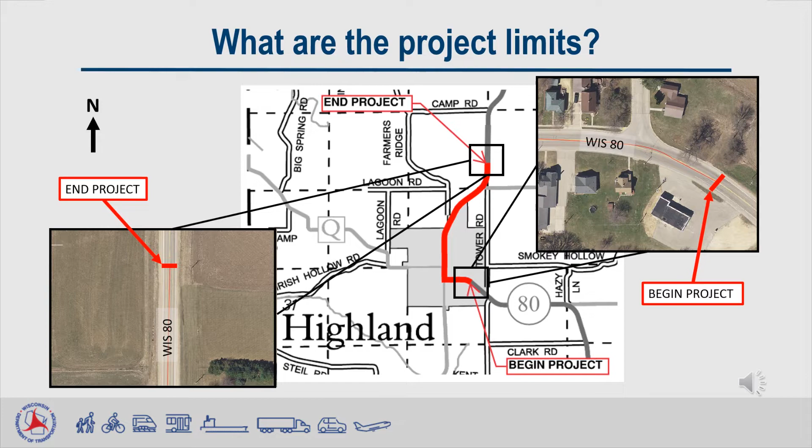Why do we need this project? The primary purpose is to repair the pavement deterioration along Highway 80. The roadway surface is aged and deteriorated with longitudinal, transverse, and alligator cracking. The photo on the left shows longitudinal cracking and potholes in the wheel path near Progressive Way. The photo on the right shows longitudinal cracking and rutting in the wheel paths of the travel lane.

Treatment is needed to extend the service life of the pavement.

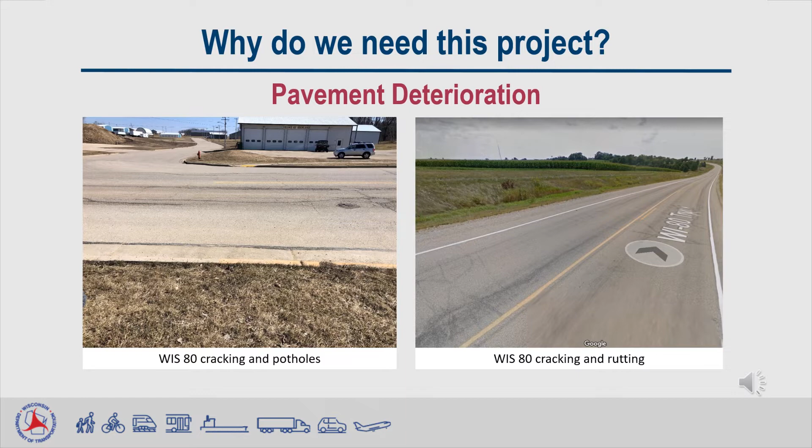Another reason for the project is the sidewalk curb ramps located in the village of Highland are not fully up to the Americans with Disabilities Act standards. The photo on the left is the curb ramp at Progressive Way intersection, and the photo on the right is of a curb ramp at the Merchant Street intersection. These photos show the lack of a level landing and acceptable grades for sidewalk curb ramps. The proposed project will address these deficiencies to the extent that is possible.

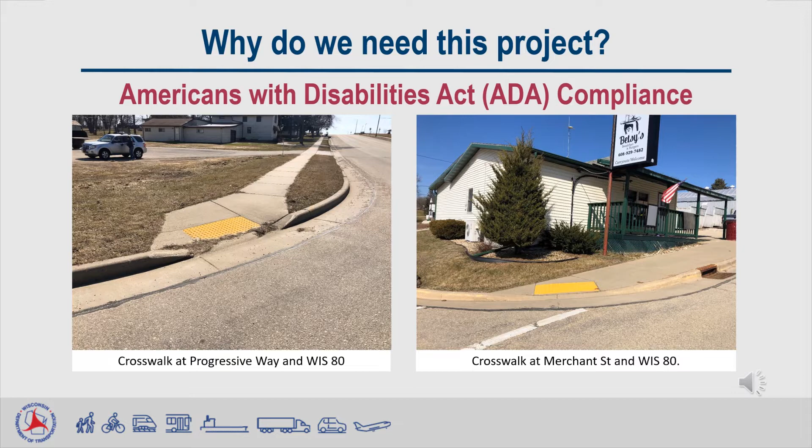What are the proposed improvements? The proposed project includes resurfacing Wisconsin 80, shown in red in the picture on the left. The resurfacing section includes removing 2.5 inches of the existing surface and paving back 3.5 inches of new asphaltic material. The picture on the top right is of a milling machine removing asphaltic pavement surface.

A similar machine will be used for the proposed project on Wisconsin 80. The picture on the bottom right shows an asphalt paving crew placing new hot mix asphalt. A similar process will occur on Wisconsin 80 with the proposed project. The next collection of slides will explain each proposed improvement in more detail.

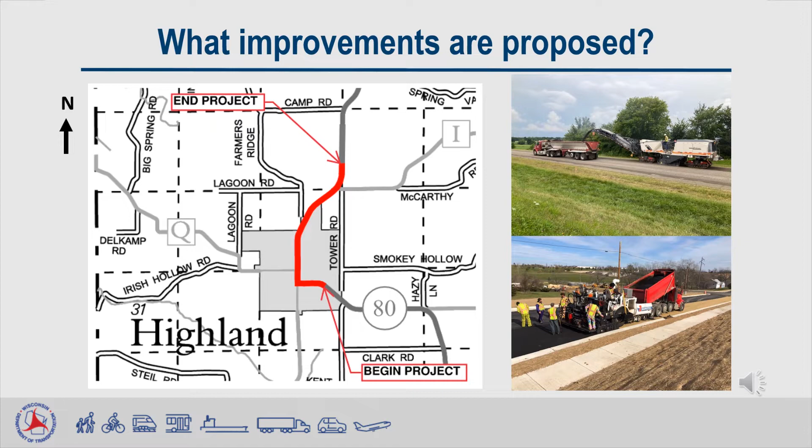Design overview. The typical sections for the project are broken into an urban typical section, shown on this slide, and a rural typical section, shown on the next slide. The urban typical section is for the portion of Wisconsin 80 located in the village of Highland, from Kennedy Street to Farmers Ridge Road. As previously mentioned, the pavement will be milled to a depth of 2.5 inches and paved back with a depth of 3.5 inches in the travel lane.

The parking lanes will be paved with a thickness of 2.5 inches at the curb and gutter and 3.5 inches at the edge of the travel lane. This allows for a thicker pavement in the travel lanes. The thicker pavement structure will provide for a longer pavement life. The existing curb and gutter will remain in place.

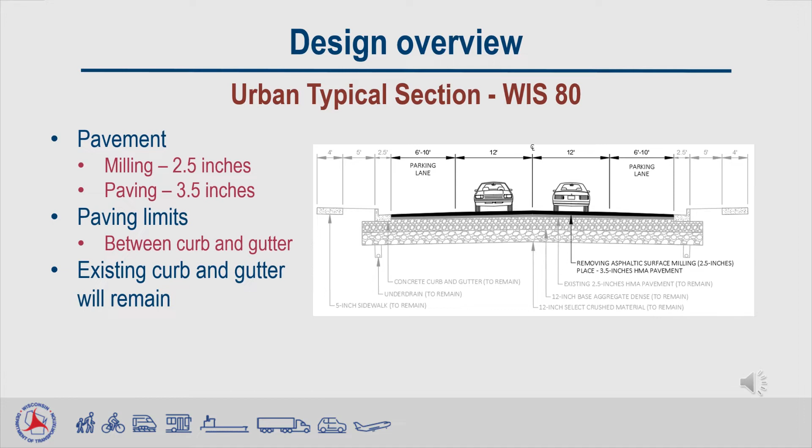The rural section of Wisconsin 80 is located to the north of the village of Highland, from Farmers Ridge Road to 0.27 miles north of the County Trunk Highway I intersection. In this section, the pavement will be milled to a depth of 2.5 inches and paved back with a depth of 3.5 inches. There will also be new shoulder aggregate placed on both shoulders of the highway.

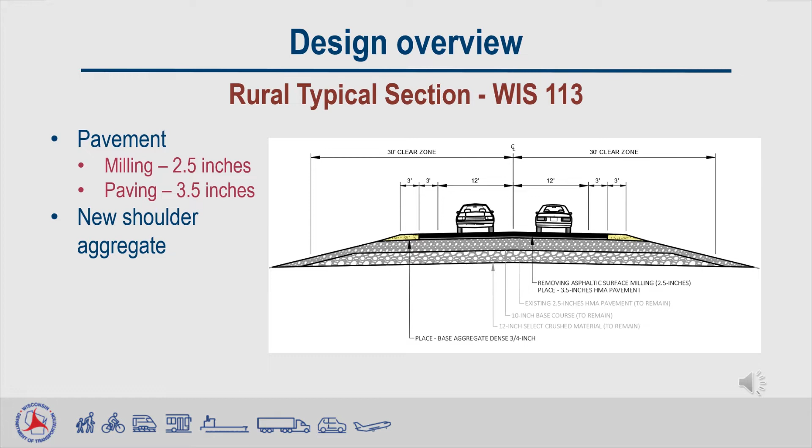Next, I'll discuss the curb ramp improvements along the project. The locations of the curb ramps proposed to be improved to meet Americans with Disabilities Act standards are at the following intersections: Kennedy Street, Grand Street, Isabell Street, Main Street, Diagonal Street, Merchant Street, Dodgeville Street, St. Anthony's, Upland Hills Mid-Block Crossing, and Progressive Way, Park Street. The curb ramp improvements will also consist of reconfiguring the intersection crosswalks at some of the locations.

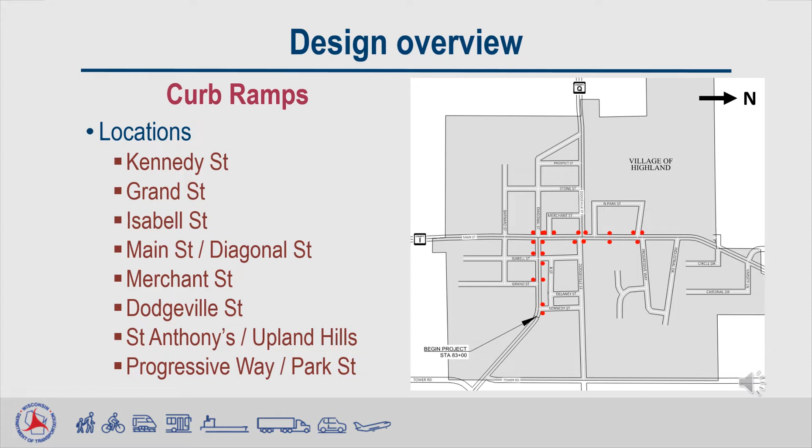Small areas of real estate and/or temporary easements may be required to construct the proposed curb ramps.

At the Kennedy Street intersection, a curb ramp will be added in the northeast corner. The red line shows the proposed crosswalk that will be added to this location. Additionally, the existing curb ramp in the northwest corner will be updated to meet current Americans with Disabilities Act standards. Small areas of real estate and/or temporary easements may be required to construct the proposed curb ramps at this location.

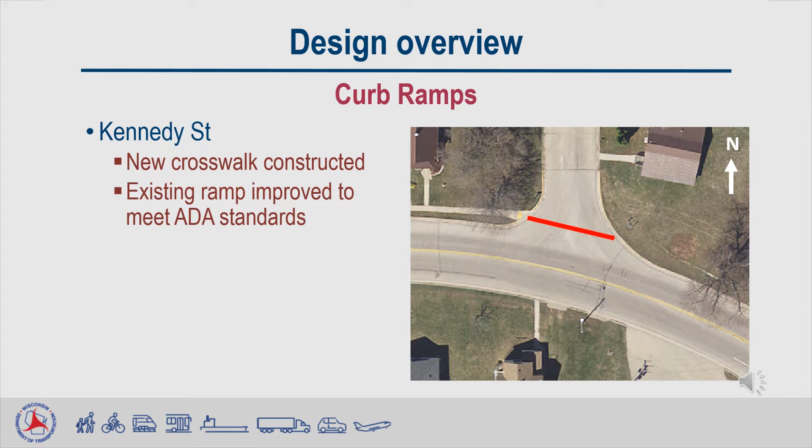At the Grand Street intersection, the existing curb ramp will be removed and shifted to the west. This will allow for a new ramp to be constructed on the north side of the highway and avoid the driveway at this location. The new crosswalk is shown in red above. The proposed ramps will be constructed to meet current Americans with Disabilities Act standards. Small areas of real estate and/or temporary easements may be required to construct the proposed curb ramps at this location.

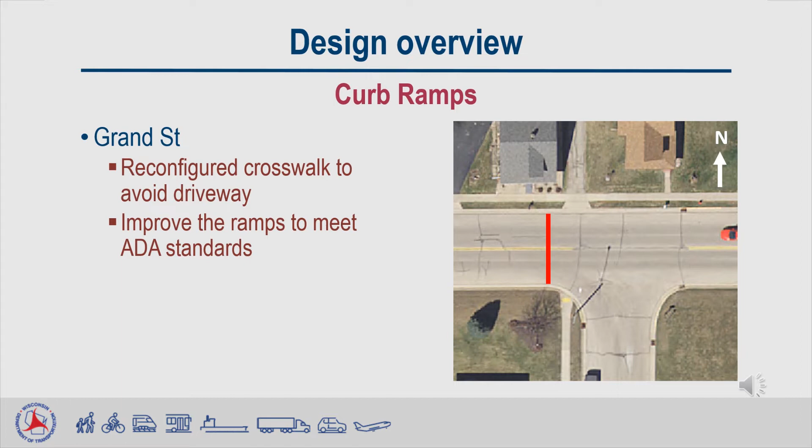At the Isabell Street intersection, the existing curb ramps will be reconfigured to cross Wisconsin 80 and Isabell Street at right angles. The proposed crosswalks are shown in red above. The proposed ramps will be constructed to meet current Americans with Disabilities Act standards. Small areas of real estate and/or temporary easements may be required to construct the proposed curb ramps at this location.

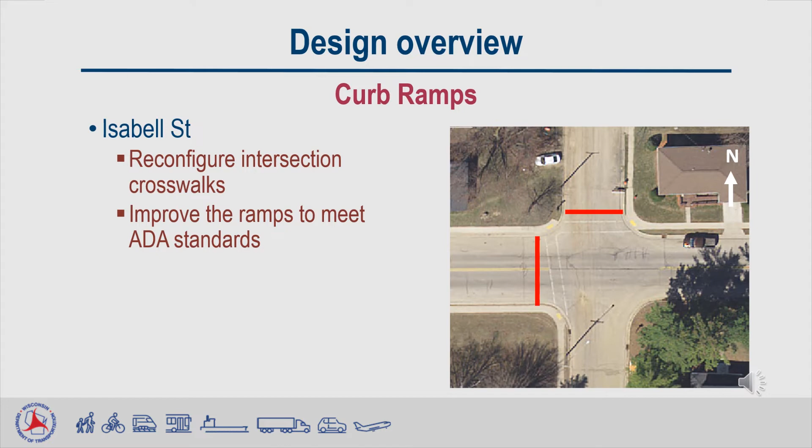At the Main Street, Diagonal Street intersection, the existing curb ramps may be reconfigured to improve the layout of the ramps. Existing utilities, structures, and storm sewer inlets will have to be avoided to allow for the upgrades. The proposed ramps will be constructed to meet current ADA standards. Small areas of real estate and/or temporary easements may be required to construct the proposed curb ramps at this location.

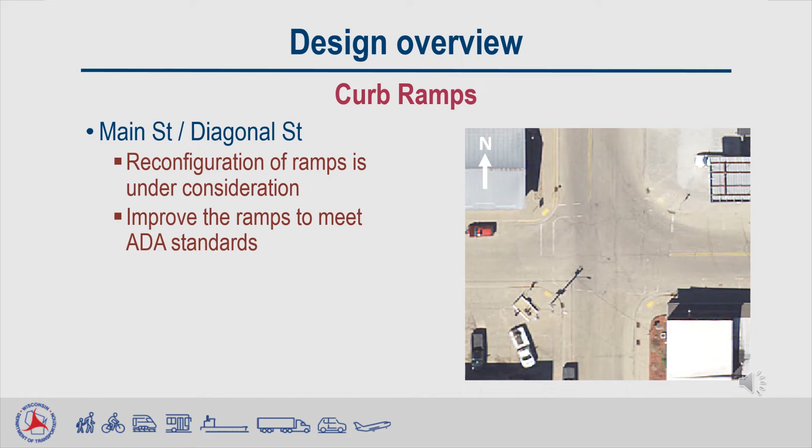At the Merchant Street intersection, the proposed ramps will be constructed to meet current Americans with Disabilities Act standards. Small areas of real estate and/or temporary easements may be required to construct the proposed curb ramps at this location.

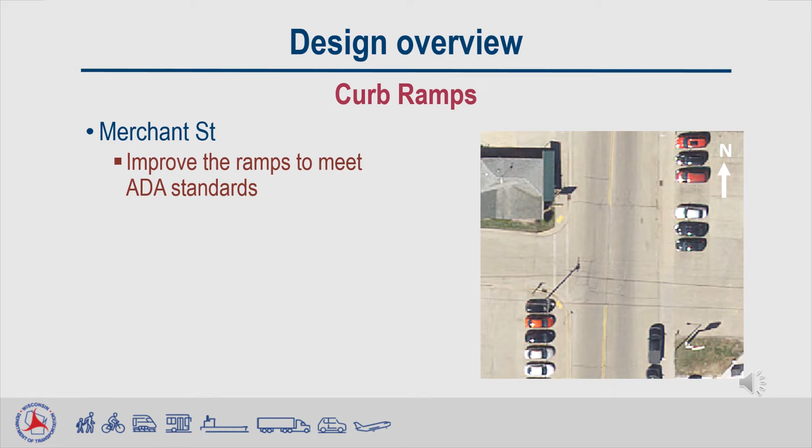At the Dodgeville Street intersection, the existing curb ramps may be reconfigured to improve the layout of the ramps. If possible, curb ramps should cross roadways at 90-degree angles. These crosswalks are shown in red above. Existing utilities, structures, and storm sewer inlets will have to be avoided to allow for these upgrades. If the upgrades cannot be constructed, the existing crosswalk configuration will remain. In either scenario, the proposed ramps will be constructed to meet current ADA standards. Small areas of real estate and/or temporary easements may be required to construct the proposed curb ramps at this location.

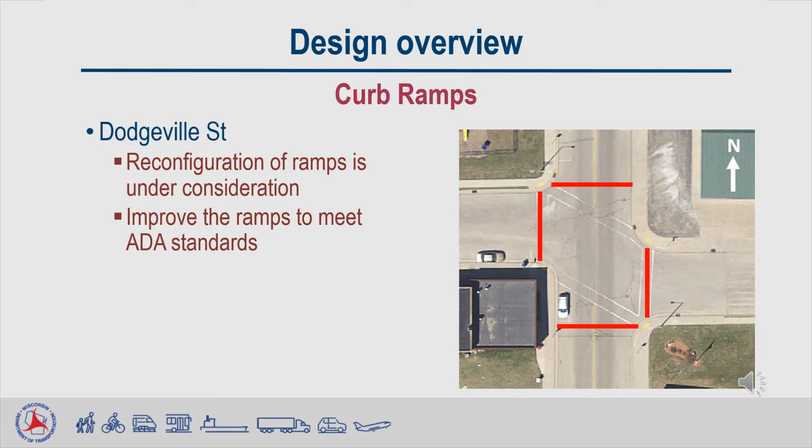At the St. Anthony's Upland Hills Mid-Block Crossing, the proposed ramps will be constructed to meet current Americans with Disabilities Act standards. The proposed ramps will be in the same location as the existing ramps. The slopes of the ramps will be adjusted to meet ADA standards. Small areas of real estate and/or temporary easements may be required to construct the proposed ramps at this location.

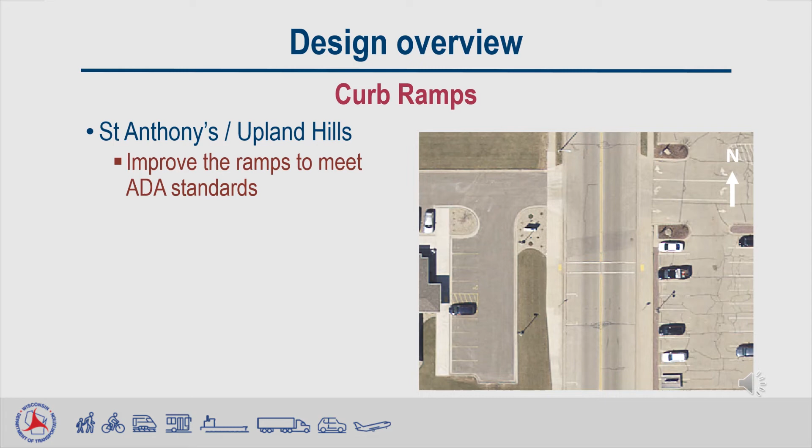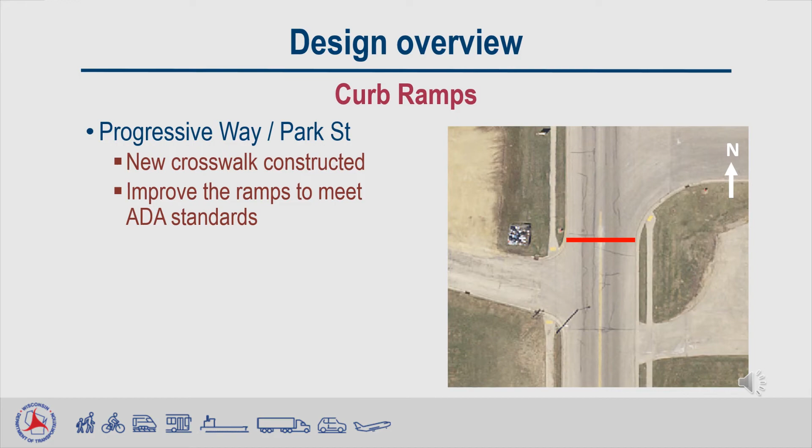What activities have been completed thus far for the project? In early 2020, the project was initiated by the planning section in the Southwest Region office in Madison. Later in 2020, a design survey was completed by a consultant surveyor. The information that was collected will be used by project staff in the design of the project. Initial coordination letters were also sent out to project stakeholders as part of our environmental report process.

In 2021, the preliminary design began on the roadway and curb ramps. Drafting of the environmental document for the project was begun. As part of the environmental document process, we are holding this public information meeting. The public plays a key role in this process. Your comments, questions, and concerns about this project are encouraged.